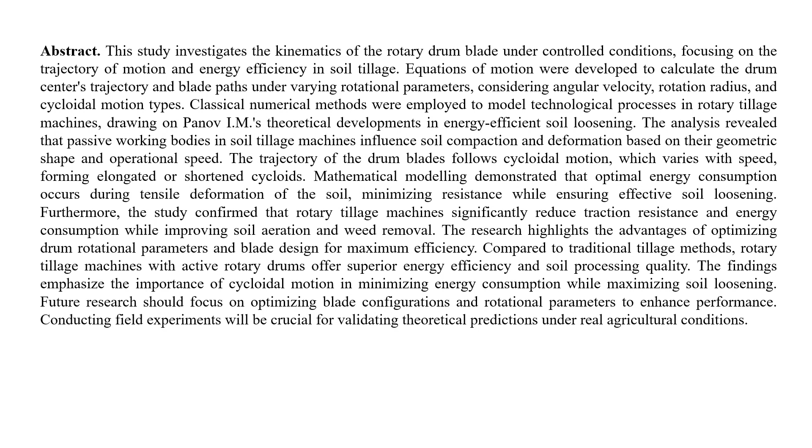In the introduction, I will start from soil preparation. As you know, soil preparation is essential in agriculture and includes operations like loosening, harrowing, and leveling. Rotary tillers with rotary working bodies are very effective because they need less energy and they can cut or break soil layers more efficiently than passive tools.

The key element is a rotor, which can work in two ways. The first one is active rotation, powered by the tractor engine, and the last one is passive rotation, driven only by soil and tractor movement. Understanding the kinematics of these rotary drum blades is important to improve energy efficiency, soil quality, and productivity.

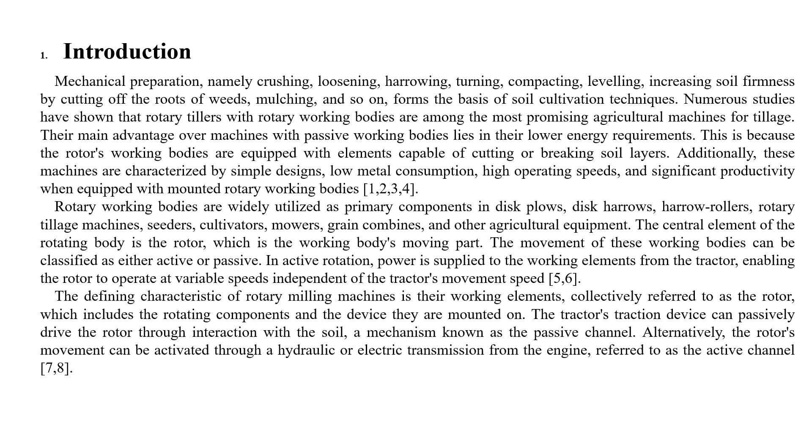In the materials and methods section, we analyzed the kinematics of the rotary drum blade under controlled conditions. We developed equations of motion to calculate the trajectory of the drum center and the blade path, considering angular velocity, rotation radius, and the cycloidal motion types.

For the modeling, we used classical numerical methods, supported by analytical mechanics and computational mathematics, following Panov's theoretical developments on soil loosening. The main idea is that soil can be loosened most efficiently through tensile deformation. Since soil has a tensile strength of about 5-6 kilopascal and a compressive strength between 65 and 108 kilopascal, loosening it through tension requires less energy.

Therefore, optimizing rotor traction speed and load conditions allows tillage machines to minimize energy use while effectively breaking the bonds between soil particles.

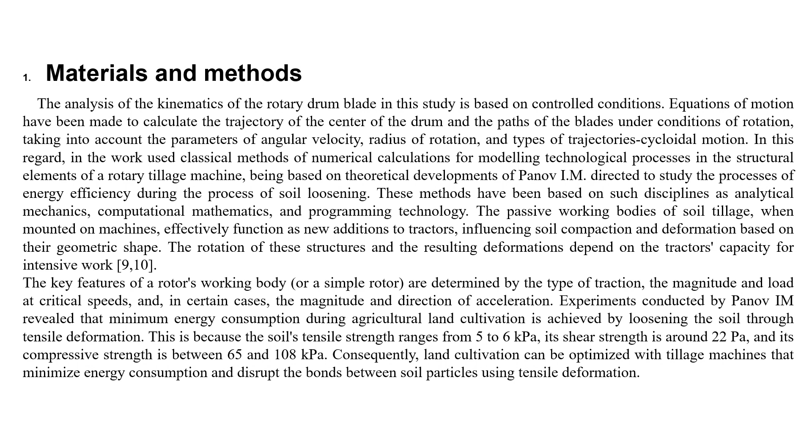In the results and discussion section, we show that cultivators with passive working bodies face problems at higher tractor speeds, such as increased soil resistance, higher energy demands, and wheel slippage. Simply adding weight to reduce slippage only compacts the soil, which is not desirable.

In contrast, rotary tillage machines demonstrate lower traction resistance and better soil quality. They also meet agricultural standards, loosening soil more effectively and removing weeds, especially in heavy clay and peat soils. We also observed that using rotary tillers reduces the number of passes needed, which saves both time and energy.

Finally, the rotary drum blade itself works as a passive body but achieves effective soil processing through self-rotation under controlled conditions. Here we can see the schematic of the rotary drum with blades. The center marked O is the axis of rotation. R represents the radius of the drum.

The drum rotates with angular velocity, while the tangential velocity of the blade tips is shown as Vm. The parameter 2 alpha indicates the angle between two blades. Va is the initial velocity of soil or water jet interacting with the blades. Finally, h represents the initial height of the medium, which in practice can be soil depth or water level, depending on the operating environment.

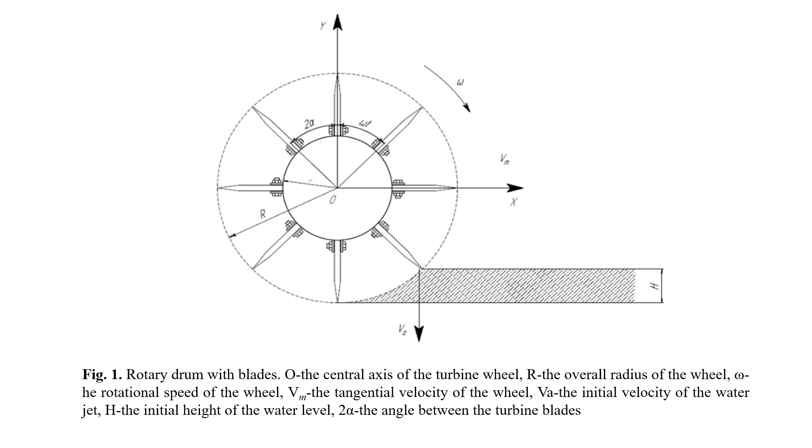The second figure shows how the rotary drum blades move and interact with soil. If the drum were completely solid, the blade tips would follow a perfect circle, but in reality, since the blades are spaced apart, each blade follows a cycloidal trajectory, shown by curved paths. These paths are marked by sequential centers O1, O2, O3, with blade points A1, A2, A3.

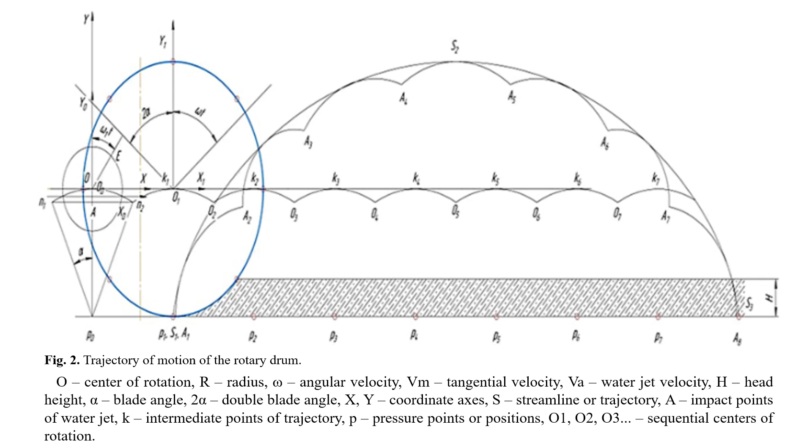Instead of forming perfect circles, the tips form a non-ideal cycloid, which varies depending on the soil resistance and blade spacing. The key point is that cycloidal motion reduces soil resistance and energy use while still achieving effective soil loosening. As I told in the beginning, figure 2 illustrates the control unit and the interaction between rotor blade and soil. I will continue to the next page.

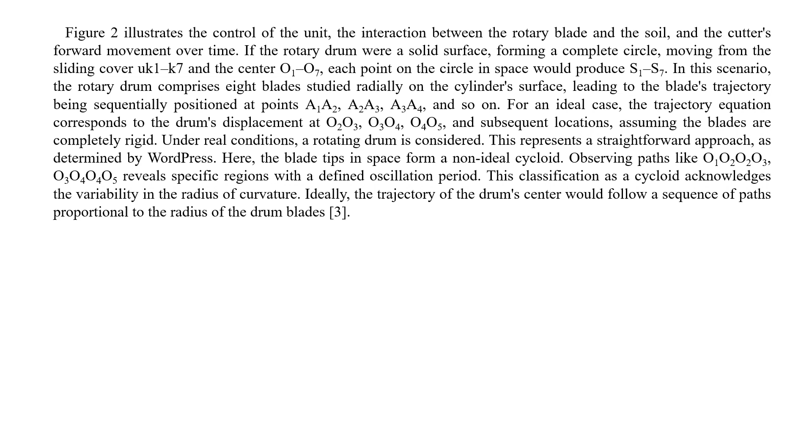Figure 3 explains how a cycloidal trajectory is formed when circle AB rolls without slipping along a surface. If we take a point like E1 inside the circle, its path forms a shortened cycloid. If the point is outside the circle, like E3, the path becomes a stretched cycloid. The radius and the rotation determine the exact curve.

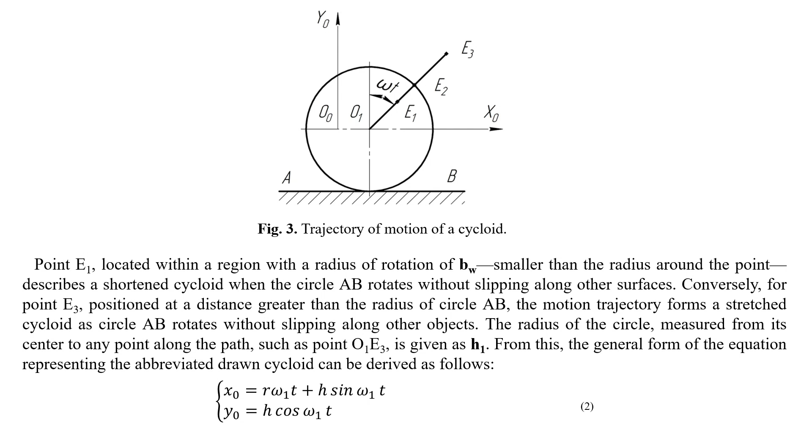In conclusion, we found that the blades follow cycloidal trajectories and these paths play a key role in reducing tractive resistance, lowering energy consumption, and improving soil loosening. Theoretical modeling confirms that when the drum operates along elongated trajectories, it ensures higher quality tillage and better removal of plant residues.

Overall, rotary tillage machines with an active rotary drum show superior energy efficiency and soil processing quality compared to conventional methods. The cycloidal motion is essential in balancing energy savings with effective soil preparation. Finally, future work should focus on optimizing blade design and validating these results through field experiments so that theoretical predictions can be applied in real agricultural conditions. We need more experiments in real life.